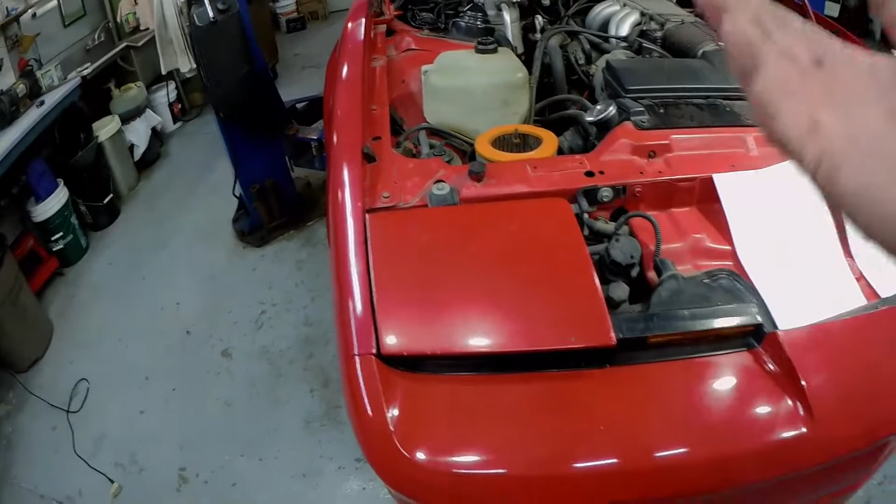1986 Trans Am, pretty nice old car, 63,000 original miles, came in. The headlights would not go up, but they would go down. Okay, how does this work?

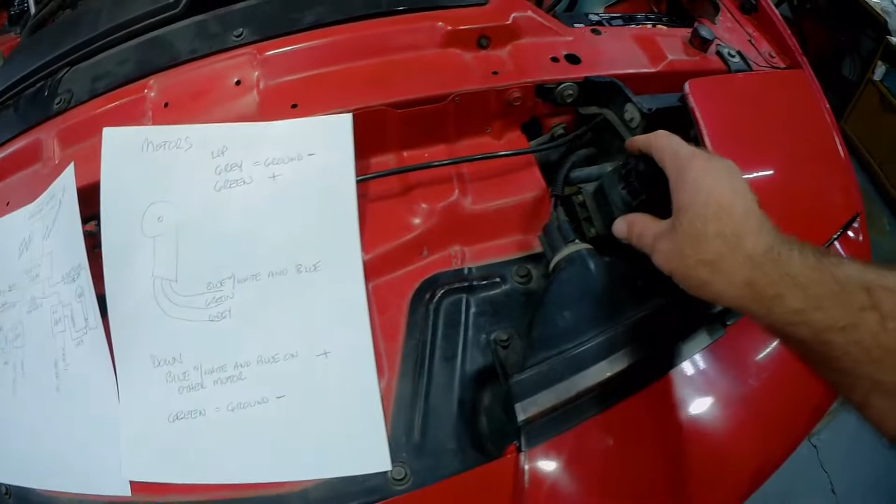So I took a bunch of stuff apart, and I found out that the motors are good. I found out when I unplugged them, I had to take this cover off to get to the wires down in here. You can see the wires.

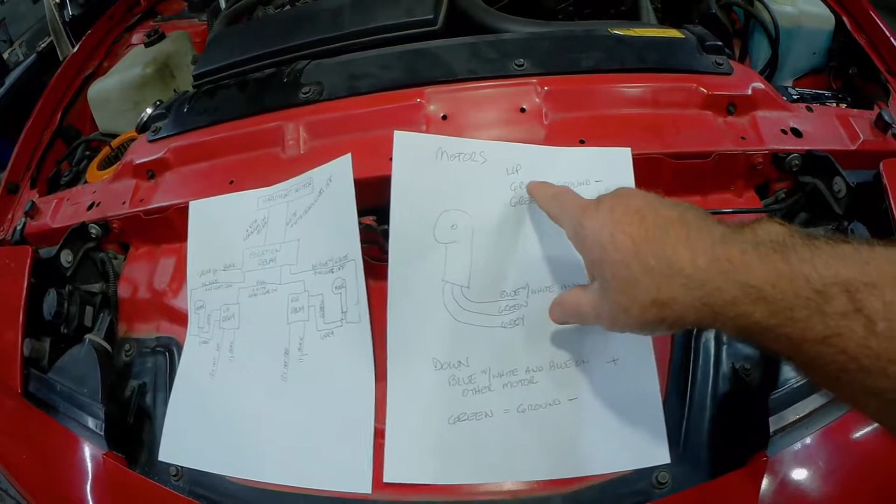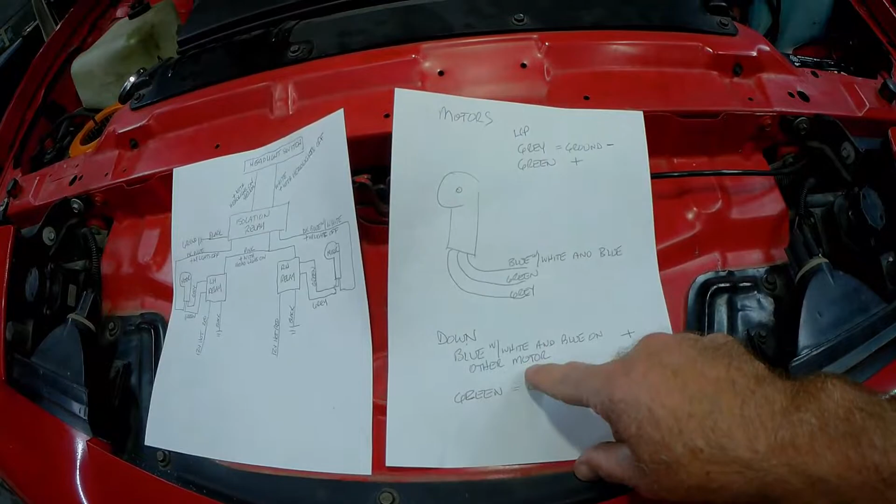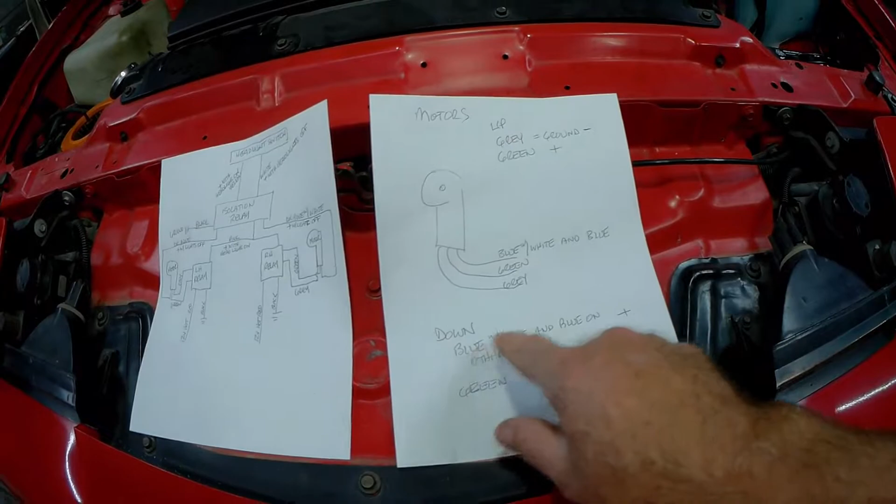I figured out that to make the motors go up, the gray wire goes to ground and the green wire goes to positive. To make the motors go down, the blue wire - one side's got a blue wire with a white stripe and the other one's just blue. To make it go down, the blue wire with a white stripe and the blue wire on this motor go to positive, and the green wire goes to ground. See, the green wire was positive up here.

So how is that done? Okay, here's how it's done. It's done with what's called an isolation relay. And this was the problem with this car. The isolation relay was bad, and you could not buy one.

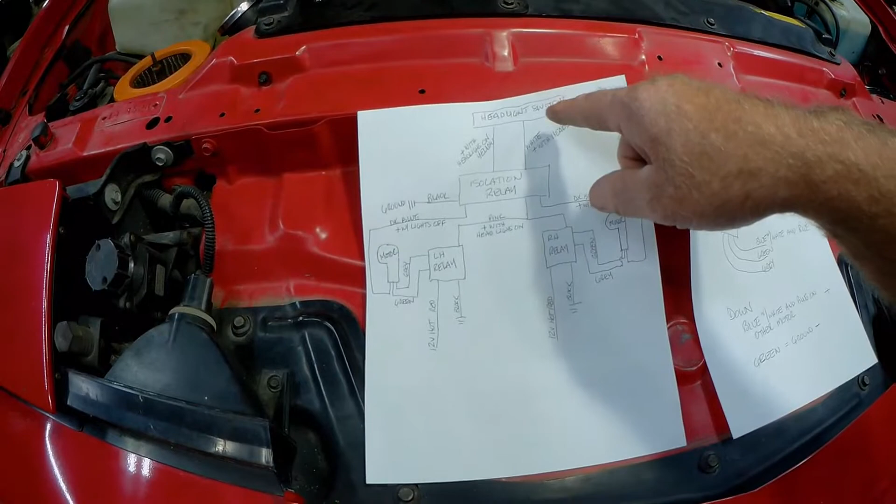Basically, here's how it works. It's very straightforward - you can hopefully freeze that if you need to and make a copy of it. Your headlight switch inside the car has two wires coming out of it to the isolation relay. The white wire is hot, or goes positive, when the headlights are off. The yellow wire goes positive when the headlights are on.

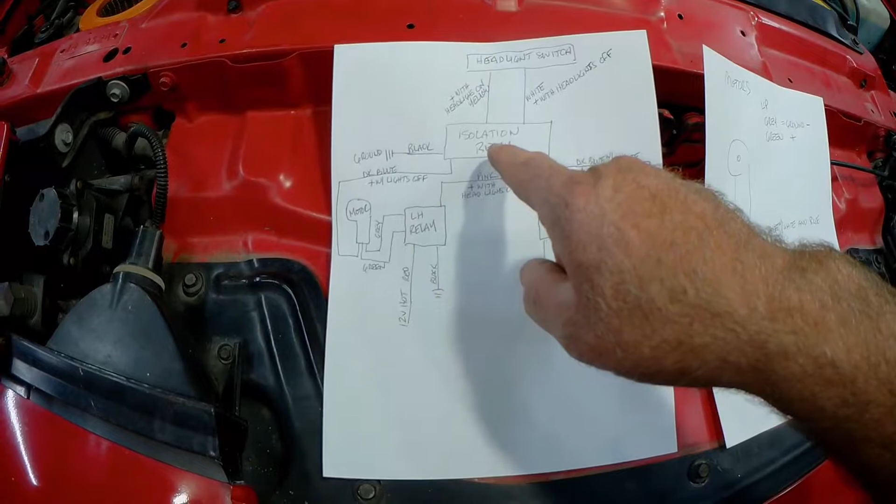When that's positive, this wire is just open - there's no power, no ground there. It's either positive here or positive there. That goes to the isolation relay. The isolation relay, what it does is when the headlights are off, it's got the positive wire power going to it from the headlight switch.

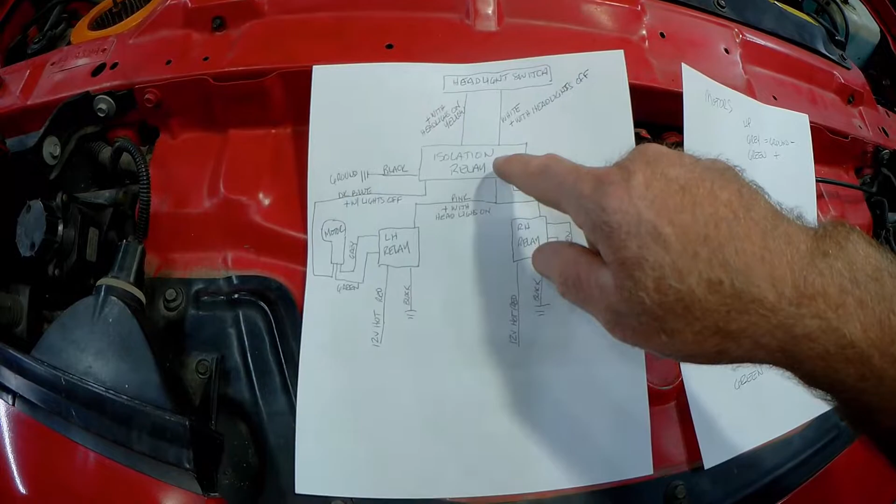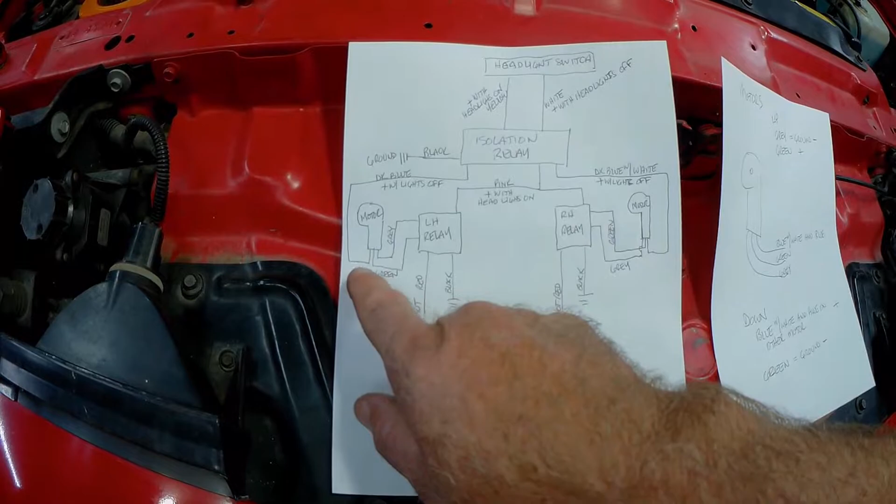It sends power out of the isolation relay to the dark blue wire with a white stripe on one side, and the dark blue wire without the white stripe on the other side. Then there's these relays - here's the relay here, there's one here, and there's one here. And I'll show you your isolation relay - that's your isolation relay right here.

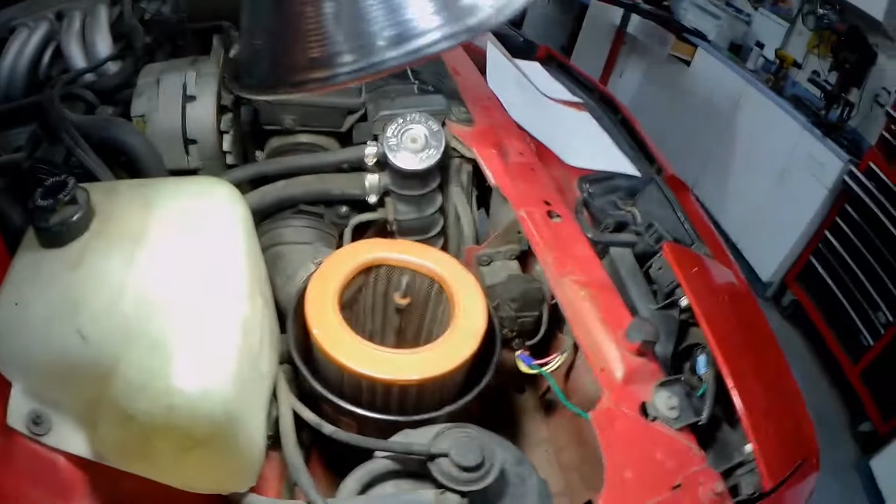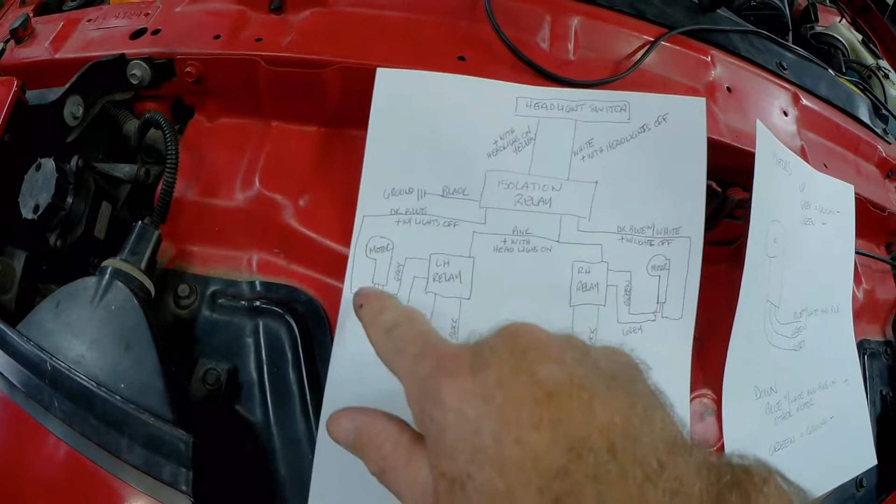You can see where that's at? Right in front of the air cleaner on this one. So when the headlights are going down, off, the dark blue wire gets hot. See? Down is blue, and blue with white and blue on other motor is hot.

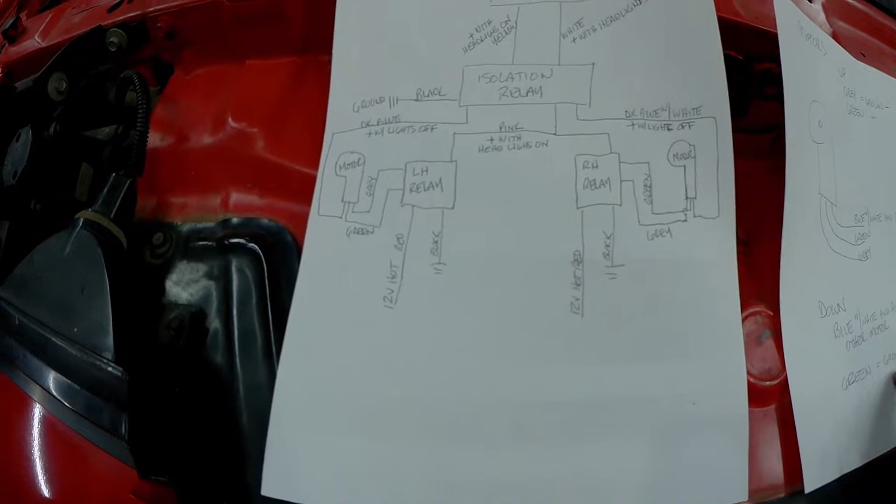The isolation relay sends positive to the blue wires, and then the relays will provide ground to the green wires. The relays have 5 wires coming out of them, and when they're off, they're going to connect the green wire, because they're off, just normally sitting there.

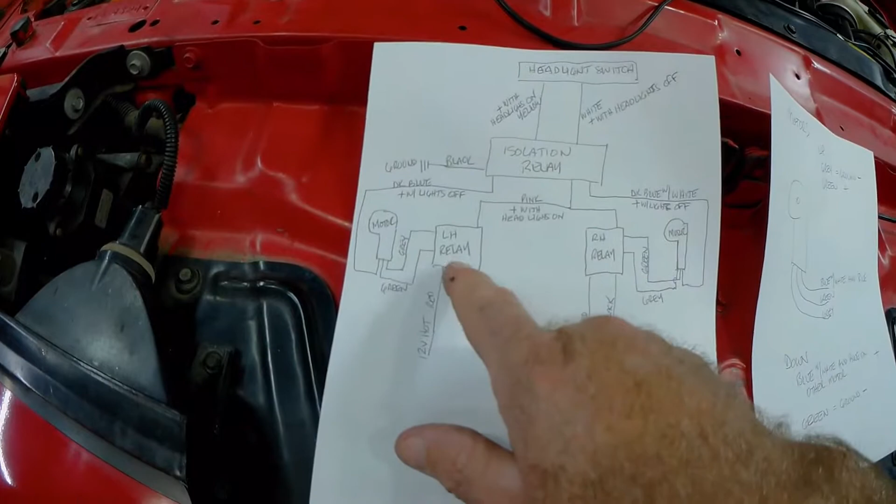When the headlights go down, these relays are in a natural state - they're shut off. There's no power going to them, so internally they're closed. They're putting the green wire to ground - they'll put the green wire to the black wire inside to ground. So that gets your ground to go down.

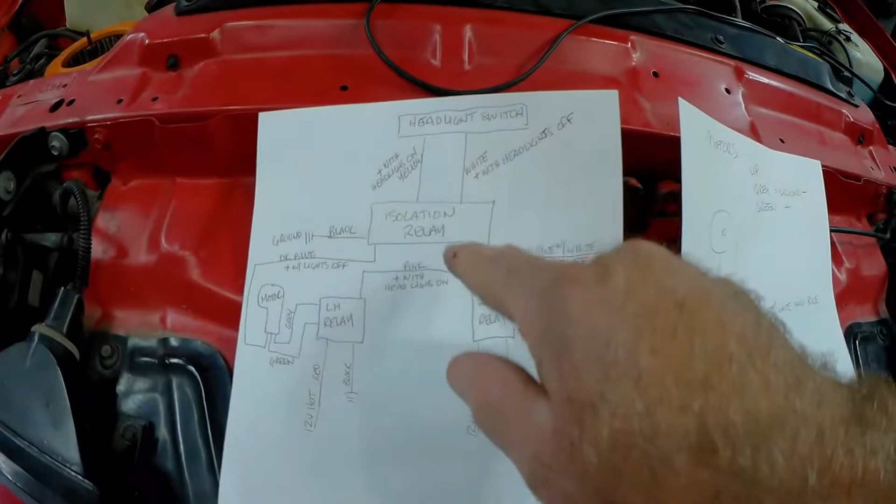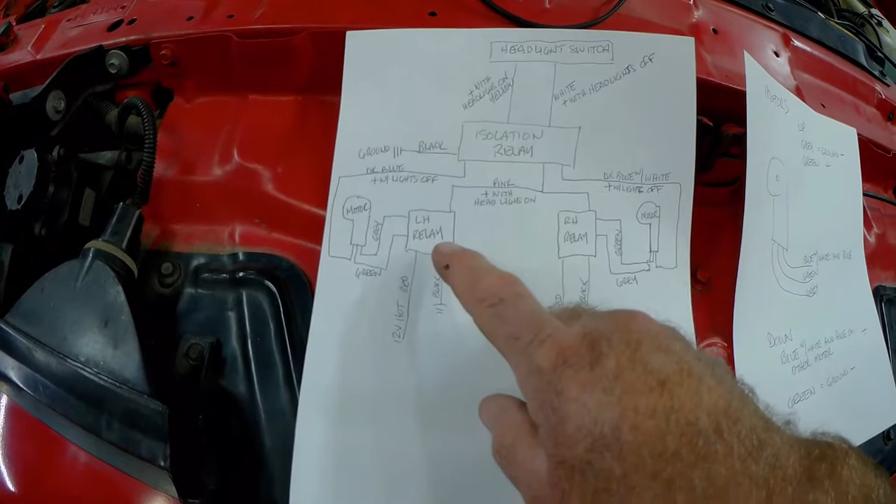Now to go up, the isolation relay shuts the power off to the blue wires and puts it onto the pink wire. That pink wire comes out and goes to both relays, left-hand and right-hand, and then the relay becomes energized. It closes, and it takes the 12-volt supply that's going to it, and puts it to the green wire. See, the green gets hot going up. So the relay closes, takes the 12 volts and puts it to the green.

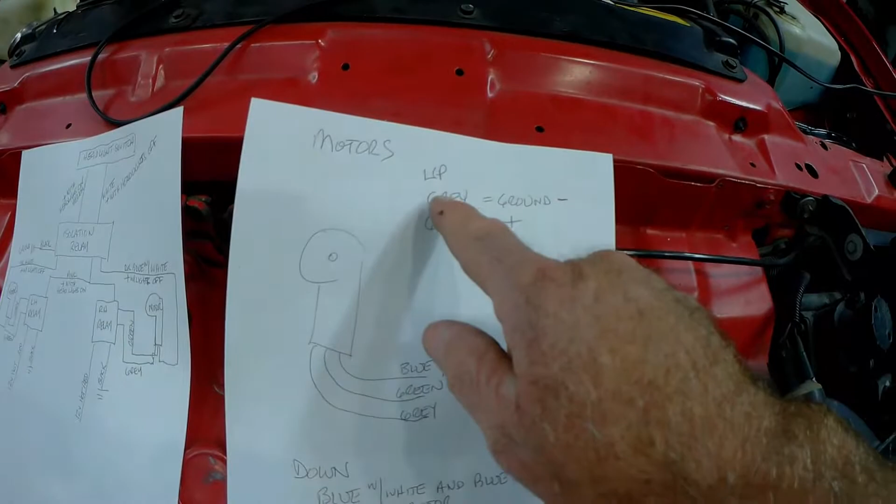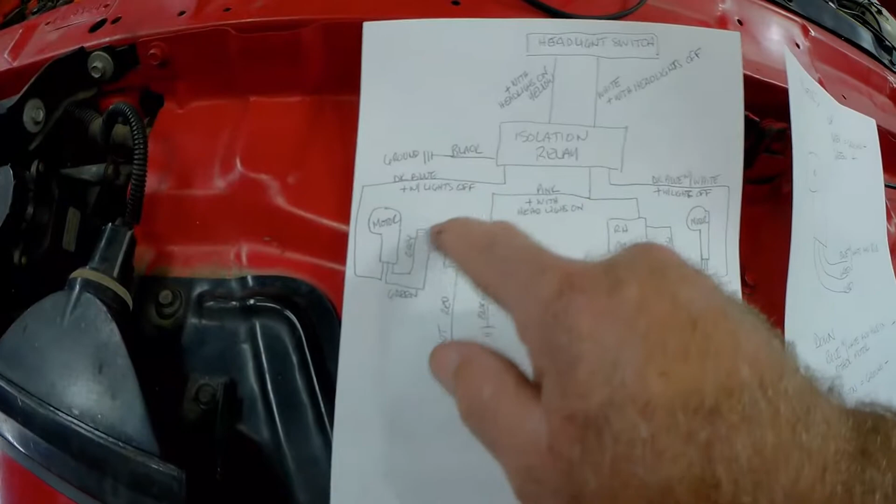Relay over on this side closes, puts the 12 volts to the green. Motor's up, gray is ground. And by the way, it supplies the ground circuit for the gray wire also at the same time. So internally in the relay, that gray wire from the motor goes to the relay, and the relay supplies power to the ground. So that's how your motors go up.

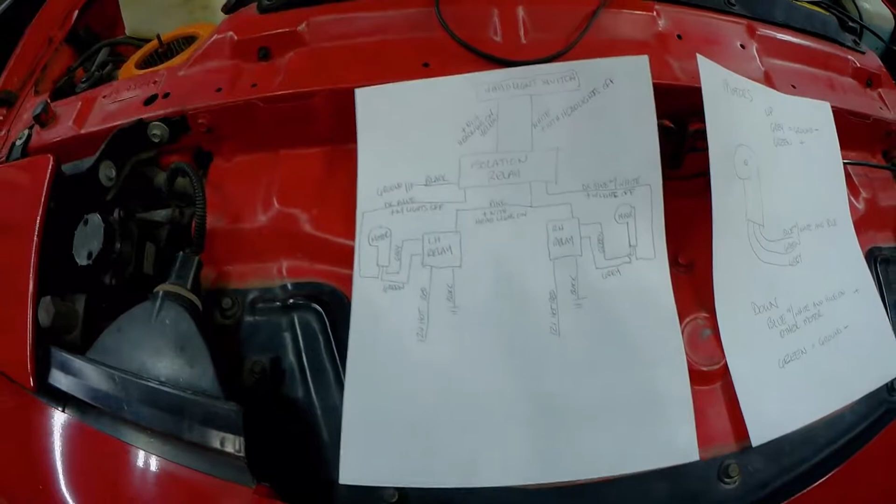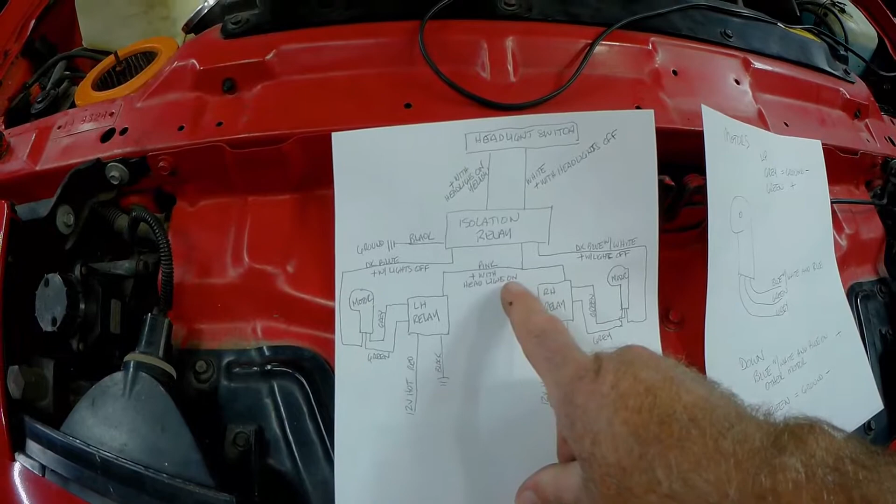In the case of this failed isolation relay, the pink wire was not getting hot, and I determined that once I figured out how this all worked. And I said, well, hell, all I got to do is pick up power from a headlight bulb and make this pink wire hot when you turn the headlights on.

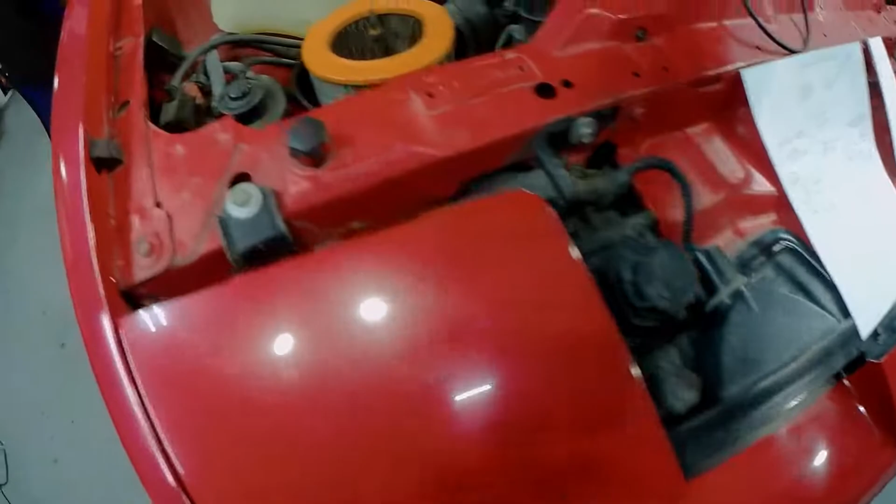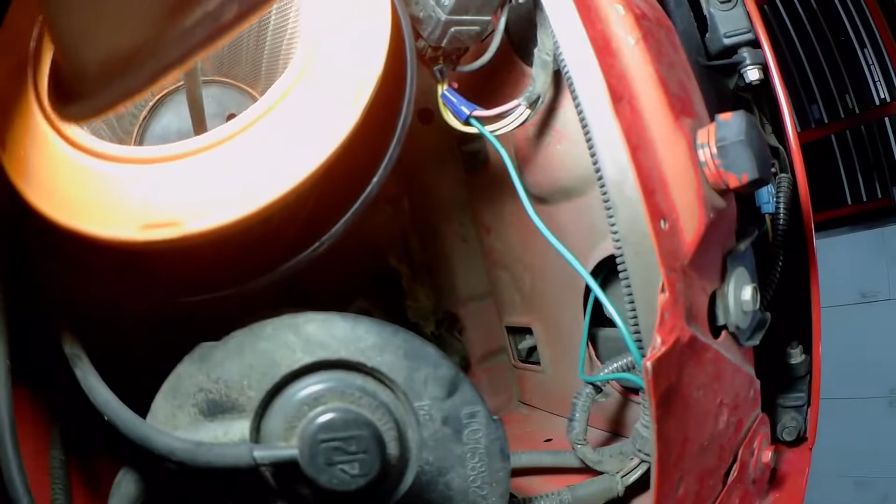That'll solve the problem of the failed isolation relay - we don't have to worry about the headlight switch sending power to it, we're just going to make this pink wire hot, and so that's what I did. I came in here and picked up power from the headlight - you can see the little green wire in there. I brought it over here and clipped the pink wire at the isolation relay. Hopefully you can make that out. And I tied the green wire that I tapped from the back of the headlight bulb to the pink wire.

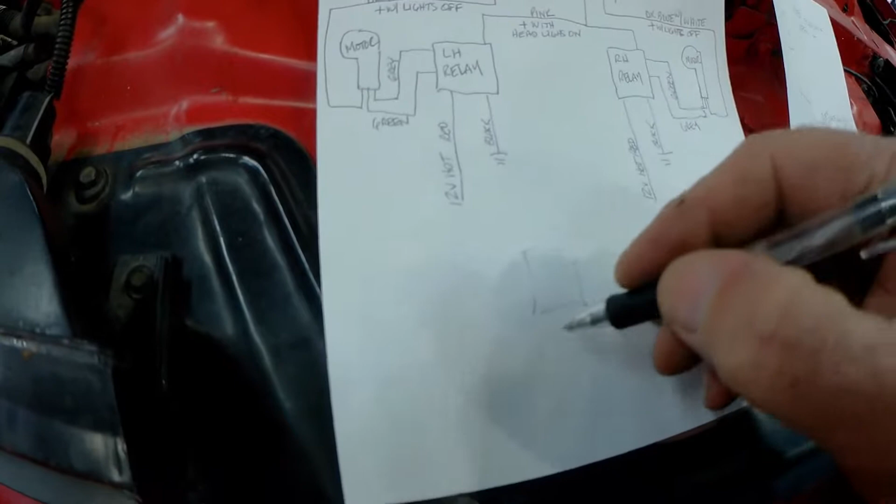So now when you flip the headlights on, when the headlight turns on, it sends... I should have drawn a picture of it. I can still do that. Here's your headlight bulb, right? It's got 3 wires going to it.

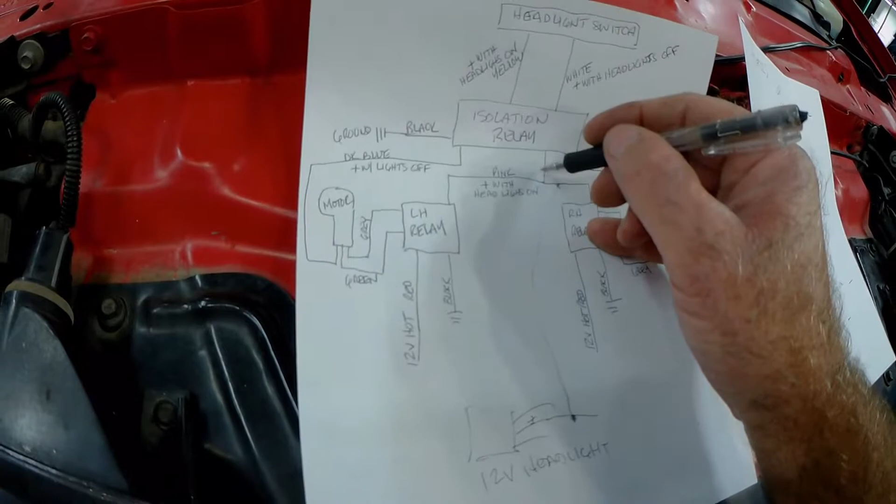The center one is your 12 volt positive for low beam. I just tapped into that and came over here and tied it to this, and I broke this connection right there. That way there was no chance I'd feed power backwards into that isolation relay. And yeah, then it works - the headlights go up and down just like they're supposed to.

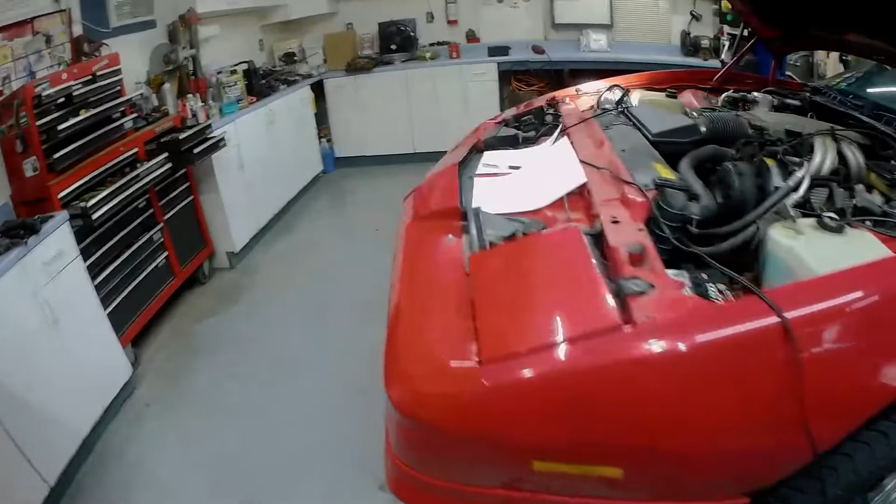So yeah, if you have a failed isolation relay, maybe this will help you. I know these cars are old, there's probably not many of them on the road anymore, but this should get you going. And if it failed the other way, if it failed to where they're only going up but not going down...

Then you got another problem, because I don't know how you'd send power. You'd have to send power out to the dark blue on both sides. Somehow you'd have to send power to that to make these go down. But you could probably do that with a maintained contact button.

All you'd have to do is come in here and clip into these dark blue wires and run a wire inside the car, have a push button that supplied 12 volts to these. Then you push it, you put 12 volts to that, you close the relay, and the relay is going to go down.

So, okay, if you have any questions, I don't know if I'll be able to answer them, but that's how I worked this out, and the customer's real happy. And we got headlights working again.